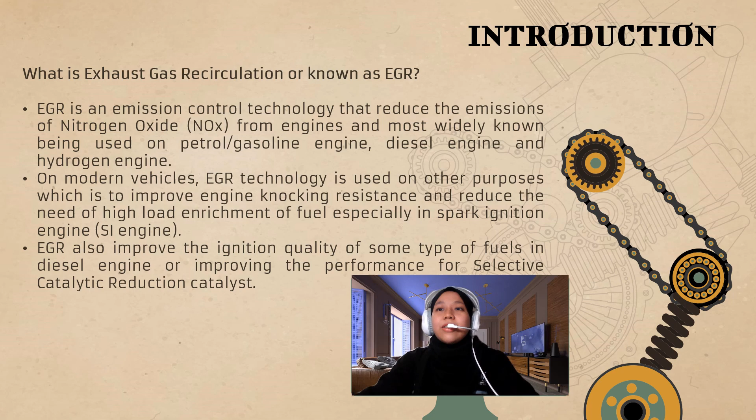So, what is the history of the EGR technology? The EGR technology was first invented as a valve in the USA in the 1970s. The EGR valve was then tested by General Motors, an automobile company in the USA, by reusing 5% to 35% of the exhaust gases.

Control systems became more complex as automakers gained experience. EGR is now required for most modern engines to meet nitrogen oxide emission limits. But thanks to recent developments, there are now engines that don't need them. One example of an engine that doesn't need EGR is the 3.6 Chrysler Pentastar engine.

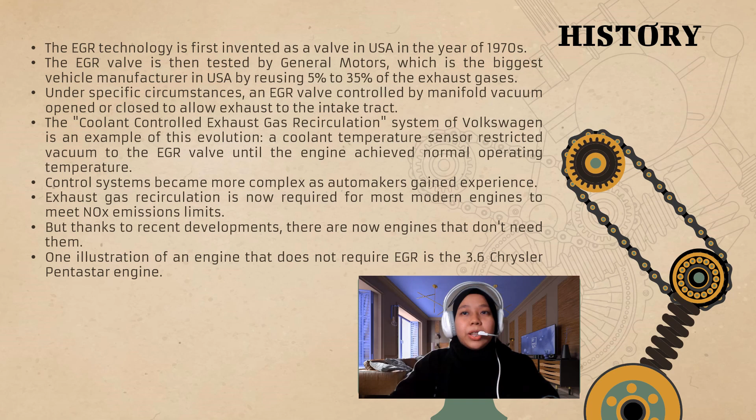B0920104550. Today I want to discuss the theory of operation and how it can improve engine operation. Let's see the first theory of operation. The first is the exhaust gas recirculation system, the EGR system. In EGR, a certain portion of exhaust gases is directed back to the cylinder head, where they are combined with the fuel-air mixture and enter the combustion chamber.

The recirculated exhaust gas serves to lower the temperature of combustion, a condition that favors lower production of nitrogen oxide as a combustion product. The second theory of operation is the air injection system. The engine-driven pump injects air into the exhaust manifold, where the air combines with the unburned hydrocarbons and carbon monoxide at high temperature, and in effect continues the combustion process. A large percentage of the pollution that was formerly discharged through the exhaust system is burned through this process.

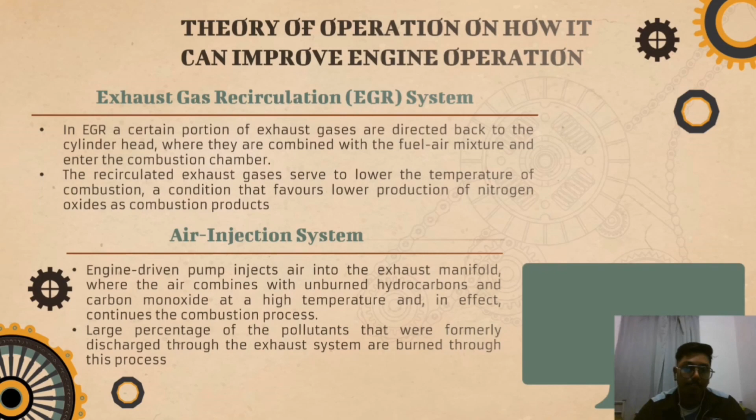The third theory of operation is the catalytic converter. In the catalytic converter, the gases are passed through packed beads, or what can be called a honeycomb, and the honeycomb contains metal that acts as the catalyst to induce the hydrocarbon, carbon monoxide, and nitrogen oxide in the exhaust to convert to water vapor, carbon dioxide, and nitrogen.

And the last theory of operation is the evaporative control system. Fuel tank vapors flow from the sealed fuel tank to a vapor separator, which returns raw fuel to the tank and channels fuel vapor through a purge valve to the canister. The canister acts as the storehouse. When the engine is running, the vapors are drawn by the resulting vacuum from the canister through a filter and into the combustion chamber, where they are burnt.

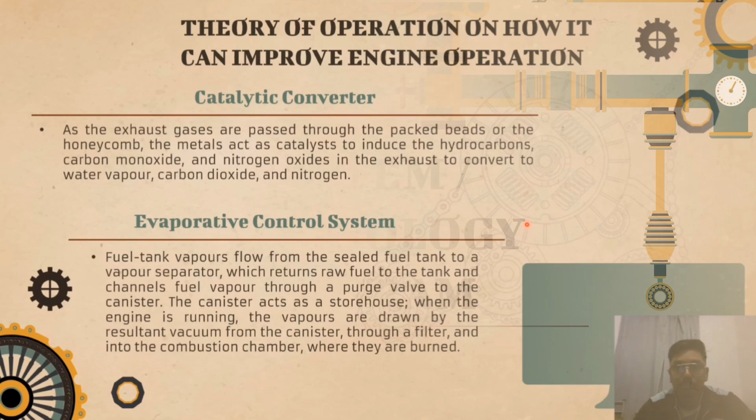Now let's take a look at the system or technology diagram. Exhaust gas recirculation is an important pollutant reduction method in petrol and diesel engines. The exhaust gas is taken directly after the cylinder. Then the EGR valve regulates the subsequent mixing of the exhaust gas with the intake air. So the function of the EGR valve is to control the quantity of exhaust gas that is returned to the intake air.

By mixing the exhaust gas with the intake air, less oxygen reaches the cylinder. Less oxygen means a lower combustion temperature in the cylinder. By this method, it can reduce nitrogen oxide quantities by up to 70% in a diesel engine, while in petrol engines it can reduce carbon dioxide emission and reduce fuel consumption.

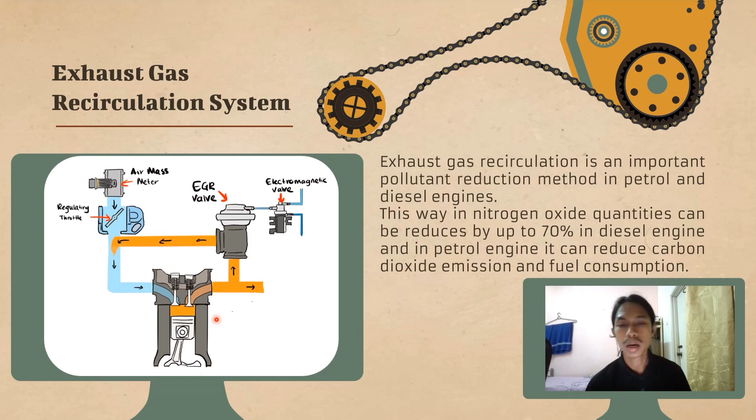B0920100091. Today, I want to talk about the advantages of the exhaust gas recirculation system, EGR. The first advantage is reduction of nitrogen oxides (NOx) emission. EGR functions by pumping some of the combustion chamber's exhaust gases back into it. As a result, the amount of oxygen available for combustion is decreased, which in turn lowers the production of NOx emission.

Next, improved fuel efficiency. The EGR system helps to cool the combustion chamber and lowers the amount of heat energy lost through the exhaust by recirculating exhaust gases. This may result in lower emission and better fuel efficiency. Next, cost-effective solution. EGR systems are a practical and affordable method for lowering emissions since they are easy to install and maintain.

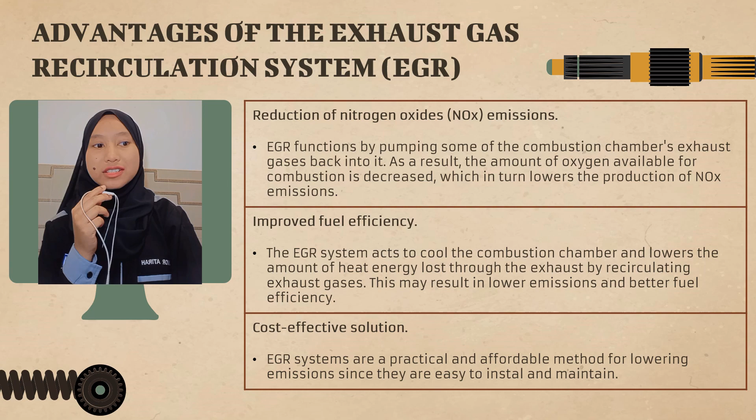The first disadvantage of the exhaust gas recirculation system is increased engine wear. The EGR system can eventually result in higher engine wear and tear since it introduces exhaust gases back into the combustion chamber. Next, reduced engine performance. The EGR system may decrease the quantity of oxygen available for combustion, which may result in diminished engine power and performance.

And lastly, reduced engine lubrication. The creation of acid and sulfur compounds, which can harm engine oil and decrease engine lubrication, is another potential consequence of the recirculation of exhaust gases.

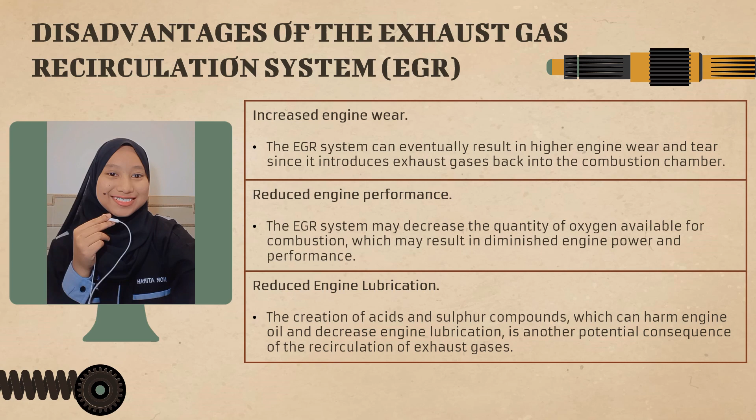So my part is the opinion about technology for the near future and improvements that should be done. The first point is increasing the EGR flow rate, which means by increasing the amount of exhaust gas recirculated back into the engine, the amount of oxygen in the combustion chamber is reduced, leading to lower NOx emission.

Second, improving the EGR cooler, which is used to cool the recirculated exhaust gas before it enters the engine system. By improving the efficiency of the EGR cooler, the recirculated exhaust gas can be cooled more effectively, reducing the amount of NOx produced during combustion. Third, using a diesel particulate filter, DPF, which can be added to the exhaust system to capture and filter out particulate matter from the exhaust gas.

And the last point is using selective catalytic reduction, SCR, which means SCR technology can be added to the exhaust system to reduce NOx emission by injecting a urea-based solution into the exhaust stream, which reacts with the NOx to form water and nitrogen.